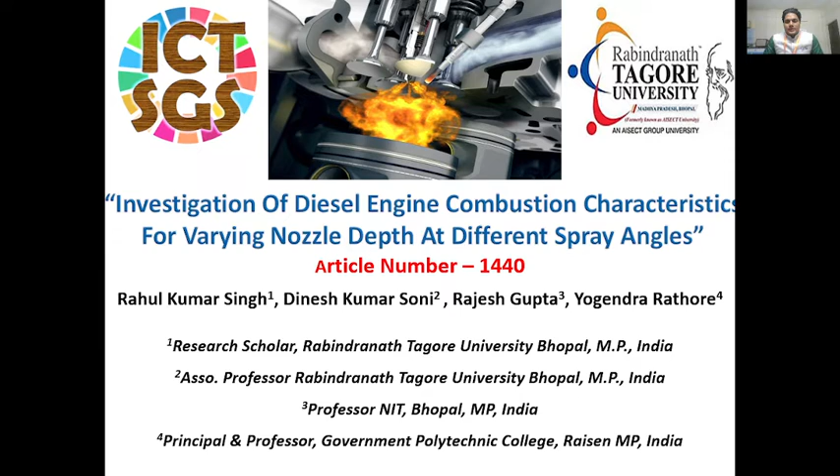Hello everyone, I am Rahul Kumar Singh presenting a paper on the topic Investigation of Diesel Engine Combustion Characteristics for Varying Nozzle Depth at Different Spray Angle. My article number is 1440.

These are the key points of this paper. The need of petroleum fuel is increasing every day, which produces major harmful effects on the environment. The need of petroleum fuel has increased simultaneously with its price in the market. Researchers around the world are focusing on reducing the harmful effect of petroleum fuel. The present research is about the reduction of harmful gases from the exhaust of the diesel engine. This research also includes the detailed analysis of the combustion and performance parameters.

A Kirloskar single-cylinder engine of model TV1 is selected for the numerical simulation for this research using a commercially available software known as AVL Fire. The further process continues with the selection of three different spray angles, 120 degree, 140 degree and 160 degree, in which 120 degree is the standard spray angle for the Kirloskar single cylinder diesel engine.

We analyze the effect of nozzle depth on the combustion parameters. The four nozzle depths are 0.5 mm, 1 mm, 1.5 mm, 2 mm, in which 1 mm is standard for the Kirloskar single cylinder diesel engine. All four nozzle depths are examined under the 120 degree, 140 degree and 160 degree spray angles. To get the suitable combustion and emission result, some compromise has been considered for the performance parameters.

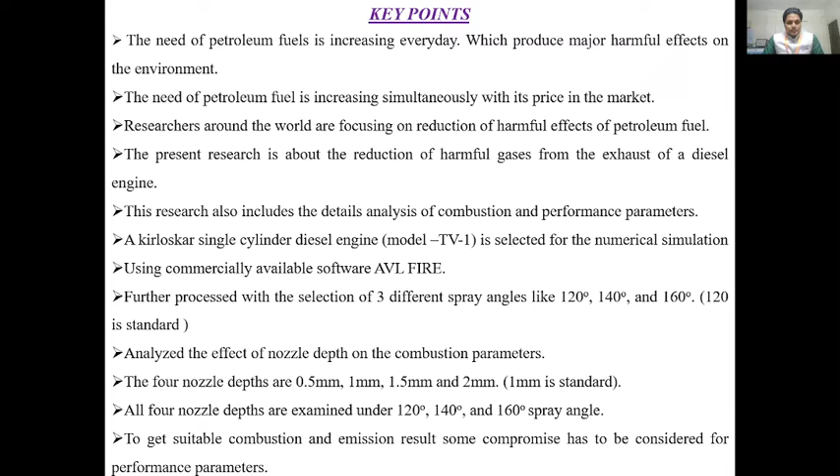This is the introduction. Modern diesel engine development is governed by maximum efficiency and low emission requirements. The variation in the spray angle at different nozzle depths has enhanced engine efficiency and decreased emissions by improving the atomization characteristics of the fuel spray.

The experimental investigation of diesel spray angle and different nozzle depth is very challenging due to the major modification in the engine from its standard condition. Hence, we use a suitable software for getting the result from the variation in the engine operating conditions. The nozzle depth and spray angle can be changed by means of the inbuilt mechanical system.

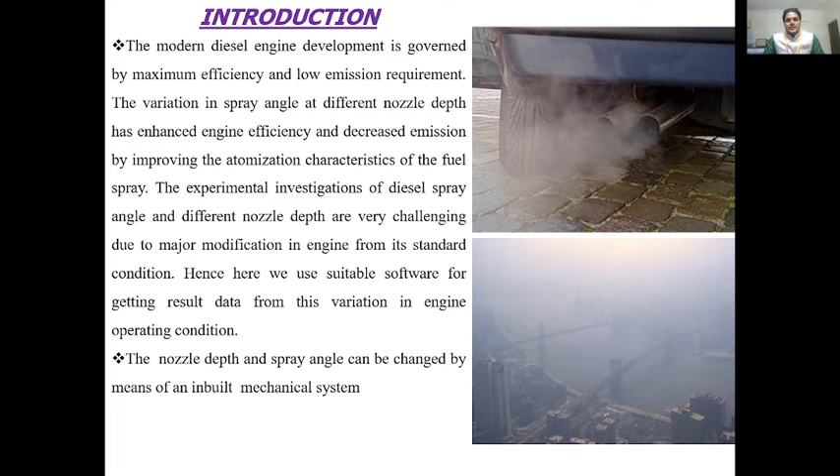Many researchers claim that most of the entire pollution is from the emission of the CI engine. As per their research, the control of emission seems to be a possible way to reduce pollution in the environment. Based on the history of emission control, the following methods are potential to reduce the emission from the diesel engine. The enhancement of air-fuel mixture due to the change in design of piston geometry leads to an improved combustion process and reduced emission parameters. The air-fuel mixture is also affected by the swirl method to reduce the emission from the engine.

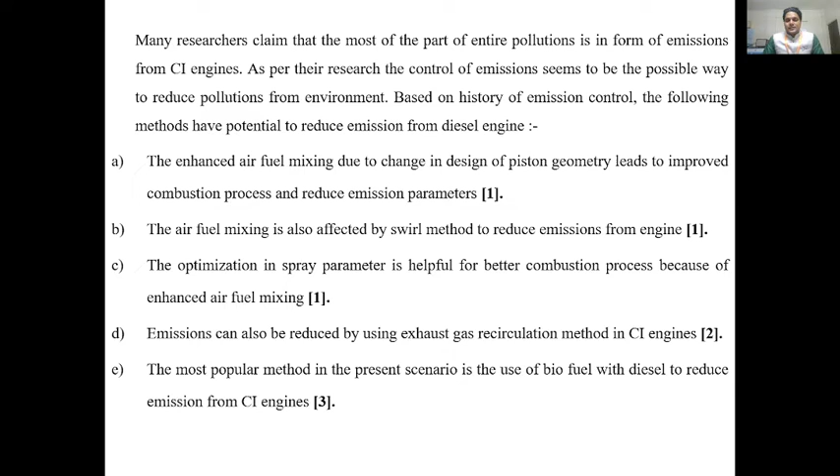The optimization of spray parameters is helpful for a better combustion process because of the enhanced air-fuel mixture. Emission can also be reduced by using the exhaust gas recirculation method in the CI engine. The most popular method in the present scenario is to use biofuels blended with the diesel to reduce emission from the diesel engine.

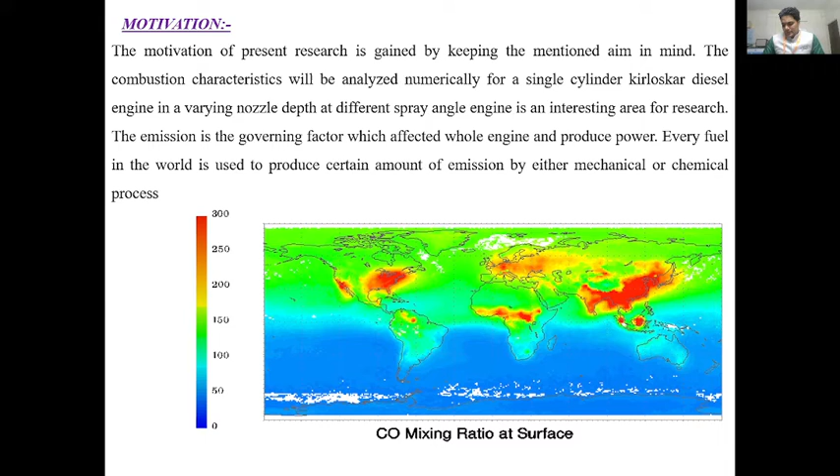The motivation of the present research is gained by keeping the mentioned points in mind. The combustion characteristics will be analyzed numerically for the single cylinder Kirloskar diesel engine with varying nozzle depth at different spray angles. The engine is an interesting area for research. Emission is a governing factor which affects the whole engine and the power produced. Every fuel in the world produces a certain amount of emission by either mechanical or chemical processes.

The objectives of this work are as follows. The nozzle depth will be changed from 0.5 mm to 2 mm and the spray angle will be changed from 120 degree to 160 degree. The optimum nozzle depth and spray angle will be found by analyzing the combustion characteristics of the engine. Commercially available simulation software is used for the numerical simulation.

The present research illustrates the effect of variation in nozzle depth at different spray angles on the Kirloskar single cylinder diesel engine. Researchers all around the world are trying to reduce heat loss from the CI engine. Thus more attention is required to analyze the heat balance at varying nozzle depth at different spray angles and to check their effect on thermal efficiency and power.

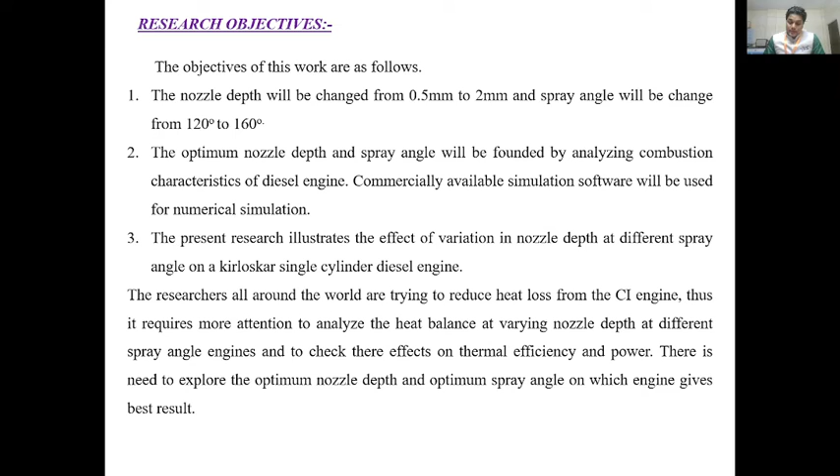There is a need to explore the optimum nozzle depth and optimum spray angle at which the engine gives the best result in terms of emission and combustion.

Research methodology. The commercially available numerical simulation software known as AVL Fire is used for the research. The present research work consists of a numerical simulation approach for the optimization of spray angle, and spray angles are categorized into three cases to achieve an optimum case. Furthermore, four nozzle depth parameters are also categorized under each case of spray angle.

At the end of the analysis, the combination of spray angle and nozzle depth is examined for a satisfactory outcome of the research. The research methodology can be presented in the following flow diagram. Firstly, numerical simulation is done with selected spray angles. There are three spray angles: 120 degree, 140 degree and 160 degree spray angle.

In each spray angle we select 4 nozzle depths: 0.5 mm, 1 mm, 1.5 mm, 2 mm, and after that we get the optimum case in terms of combustion and emission.

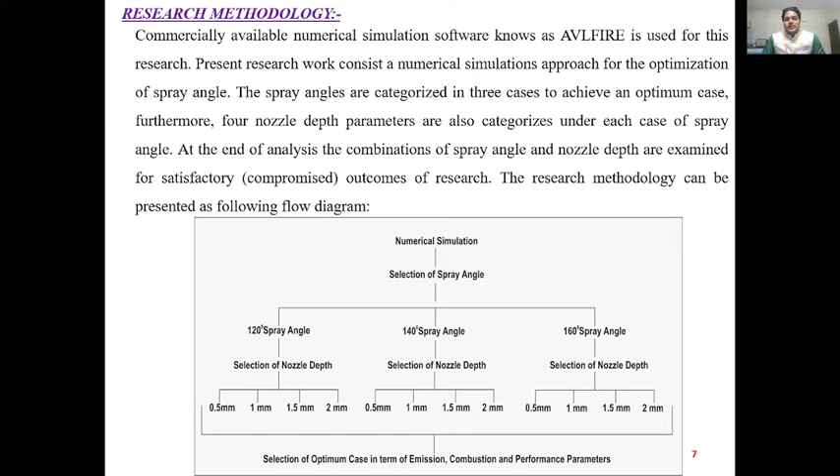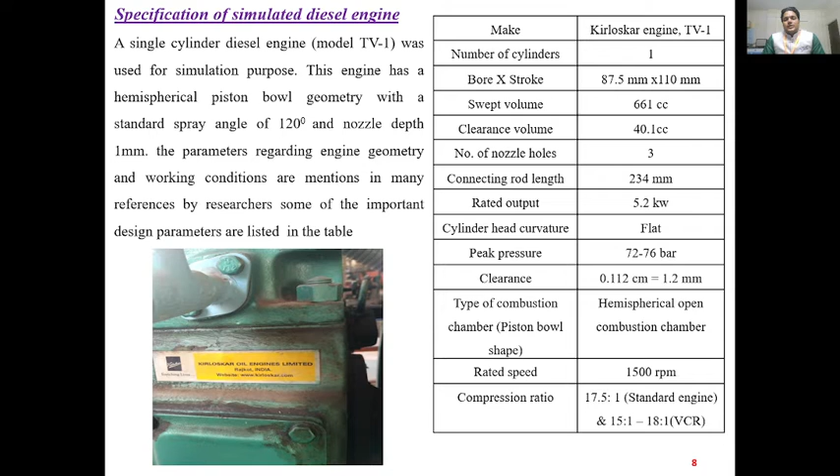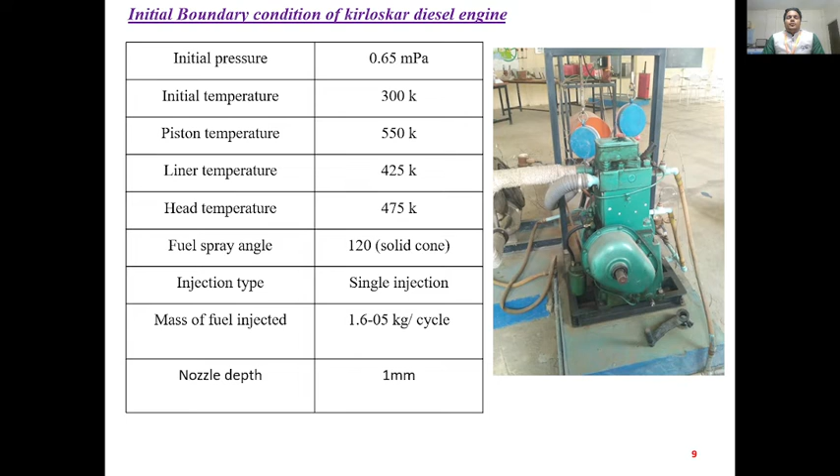Initial boundary conditions of the Kirloskar diesel engine: initial pressure is 0.65 megapascal, initial temperature 300 Kelvin, piston temperature 550 Kelvin, liner temperature 425 Kelvin, head temperature 475 Kelvin, fuel spray angle 120 degree, solid cone angle, injection type single injection, mass of fuel injection 1.6e-05 kg per cycle, nozzle depth 1 mm, which was already explained in the previous slide.

Conclusion. The following conclusions are obtained from the above results. The maximum mean pressure is observed at 160 degree spray angle and 2 mm nozzle depth, and the value of maximum mean pressure is 6061253 pascal, and the minimum value of mean pressure is at 120 degree spray angle and 0.5 mm nozzle depth, observed at 5401253 pascal, and the percentage of change of mean pressure from minimum value to maximum value is 12%.

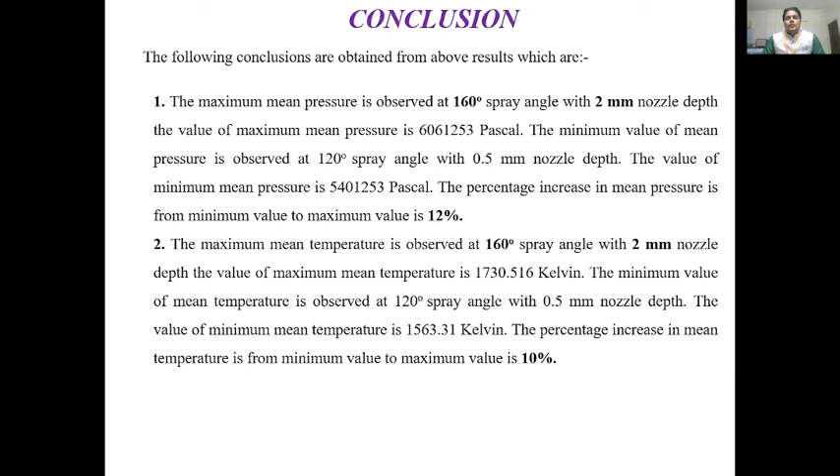The maximum mean temperature is observed at 160 degree spray angle and 2 mm nozzle depth. The value of maximum mean temperature is 1730.516 Kelvin, and the minimum value of mean temperature is obtained at 120 degree spray angle and 0.5 mm nozzle depth, where the value of minimum mean temperature is 1563.31 Kelvin, and the percentage of increase in mean temperature from the minimum value to maximum value is 10%.

The maximum heat release rate is observed at 160 degree spray angle and 2 mm nozzle depth, and the maximum value of HRR is 17.83 joule per degree, and the minimum value of HRR is obtained at 120 degree spray angle and 0.5 mm nozzle depth, and the value of minimum HRR is 13.3251 joule per degree. The percentage increase in HRR from minimum value to maximum value is 33%.

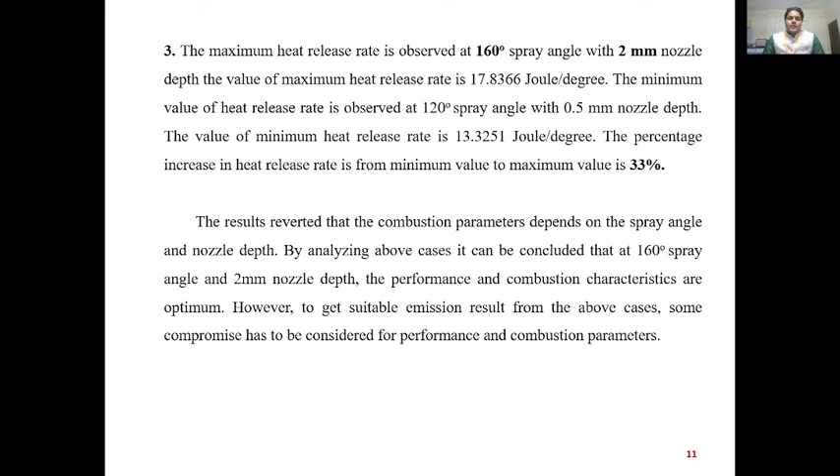The results revealed that the combustion parameters depend on the spray angle and nozzle depth. By analyzing the above cases, it can be concluded that the 160-degree spray angle and 2 mm nozzle depth give the best optimum result for the combustion parameters. However, to get a suitable emission result from the above cases, some compromise is considered.